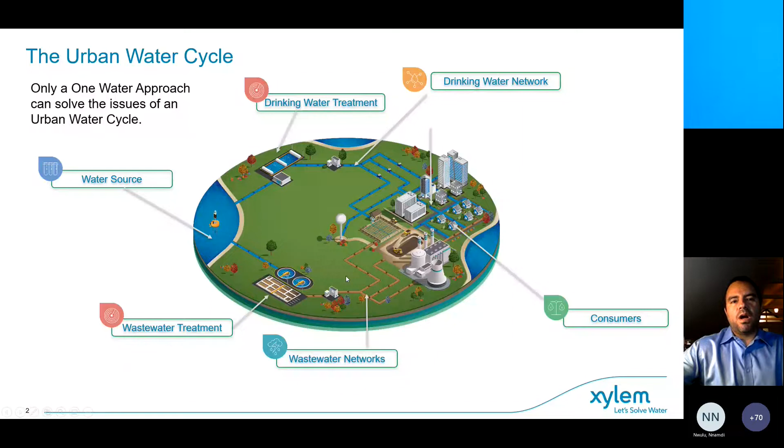But one of the things that struck me as I was finishing my PhD was the dire situation that we have with respect to water. There is a world water crisis. I think it is one of the biggest challenges that we face as humanity. We can look at a number of different aspects of our lives, but without water, we find ourselves in a very precarious situation. These are some interesting numbers that I was able to collect: 74% of world's disasters are water related, usually drought or flooding. 80% of wastewater is released to the environment without any treatment, and this water usually is consumed for drinking somewhere downstream as well. So that is a gigantic problem. More than 2 billion people lack access to safe, clean water, and 68% of the world's population will live in urban areas by 2050.

This means that the urban water cycle, and taking care of it, is more important than ever.

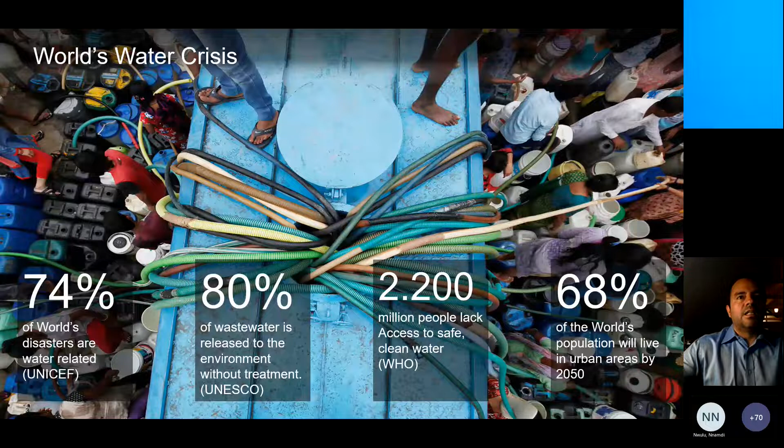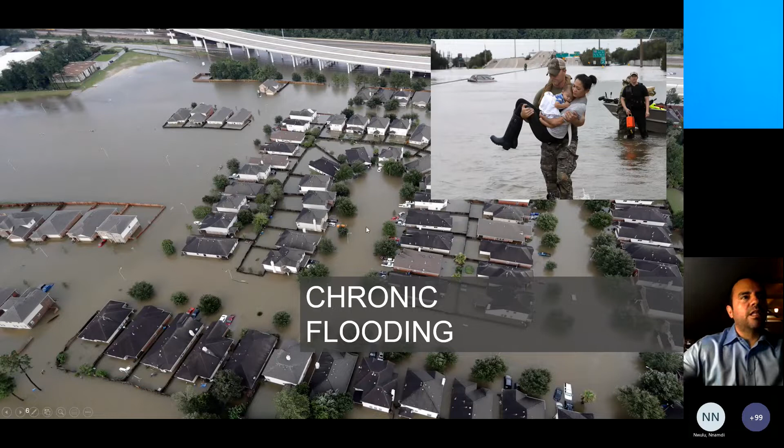Chronic flooding, we talked a little bit about this. This picture is from a 2017 storm flooding an area around Houston due to Storm Harvey. Again, a common problem found in large urban areas with large amounts of impervious surfaces.

All of these things affect our life, and the infrastructure we have to distribute and collect water is in many cases inadequate or lacking in general. This is a huge problem in the world.

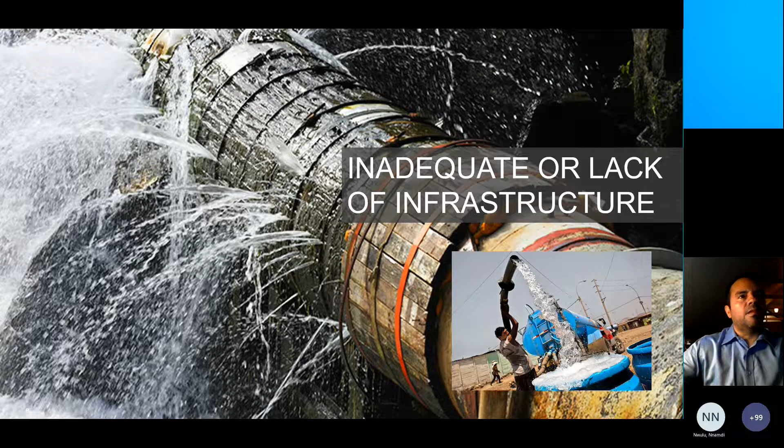When we look at the water utility, we identify a three-part problem. We call this a trilemma - it's an issue where we experience a three-part problem.

The first one is the need for capital investment. Utilities need to invest money due to changes in demographics. For example, a new area gets built that requires new infrastructure for both drinking water and sanitation services. Climate change means we need to invest in drilling new wells, building new treatment facilities, and providing infrastructure to deal with stormwater.

At the same time, utilities need to do this in a way that maintains those currently served undisturbed. And the citizens they serve have very stringent expectations about the water that comes out of the faucet.

In some locations, regulations are such that water is regulated down to the parts per billion in some cases. So there's a risk aversion that comes as a natural way of operating for these utilities.

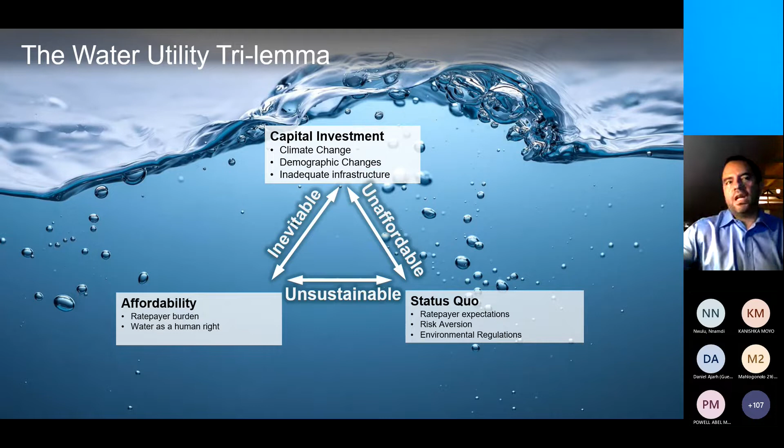Let's take one case, the city of South Bend, Indiana. This is the city where I am currently located, about an hour and a half east of Chicago. It's a small city with about 100,000 people, and about 33% of the population is below the poverty line. So by no means a wealthy city.

And they had a big problem that many cities in the United States have, which is a stormwater problem. There are more than 700 cities in the United States where the same infrastructure used to convey wastewater is also used to remove stormwater from the streets. And when it rains hard in these cities, untreated sewage gets released to rivers, lakes, and oceans to avoid flooding the wastewater treatment plant.

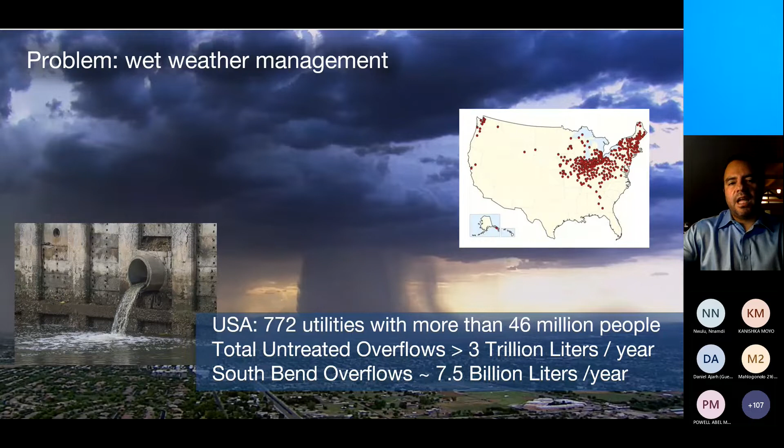Traditional solutions for this - and this was the original plan South Bend had to solve this problem - are capital intensive. Tunnels like the one in the picture are a typical large infrastructure solution to dealing with this problem. The problem is that traditional solutions to solve the stormwater problem in this city exceeded $1 billion, meaning more than $10,000 for every inhabitant in the city, which is clearly unaffordable.

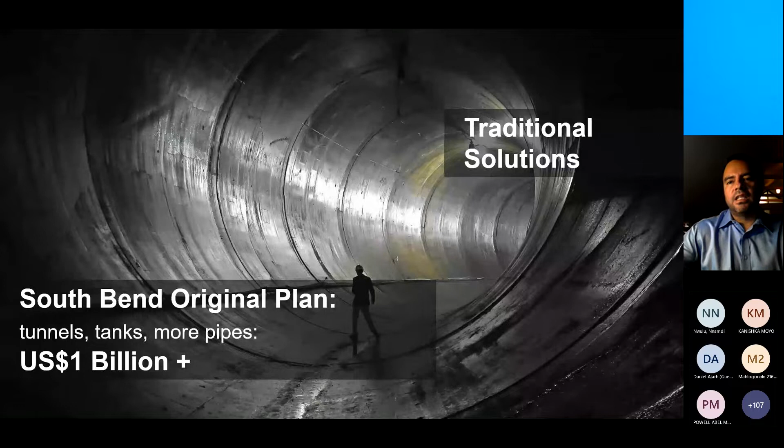So this is where we start considering digital solutions to solve this problem. The framework we use is called the Real-Time Decision Support System Framework. It leverages Internet of Things, artificial intelligence, and optimization algorithms to implement a framework where we first collect data to understand and observe how the system has behaved in the past, where it's been trending, and where it currently is.

We use a model to predict how the system will behave in the future, which serves as a digital twin to try out strategies on a model before we implement them in reality.

And then an optimization layer that allows us to try to determine what are the best action items to be able to operate the system better, to avoid overflows, to avoid flooding, to avoid leakage, to reduce energy. So these three parts feed into humans, the operator, for example, that then enacts these action items.

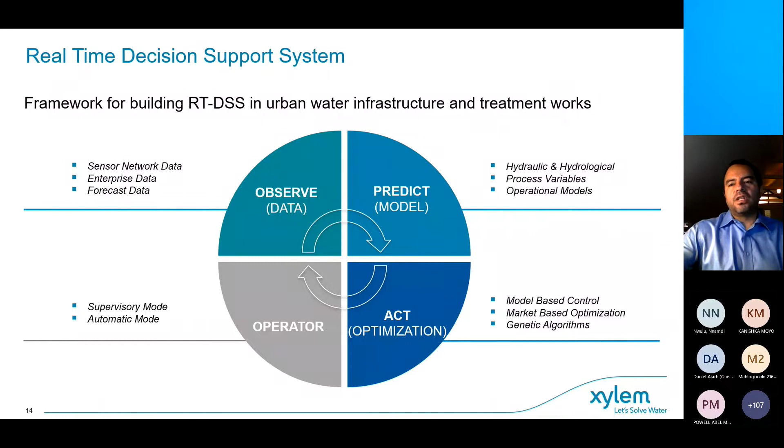Let's take a closer look at these three layers. The first layer, in this case, we call 'turning on the lights,' and we use this phrase because we're trying to understand how this infrastructure, which is in many cases completely underground, is behaving. This is different than, for example, managing transportation, where we can actually see roads, see how they are maintained, if they are crumbling down or not. A lot of this infrastructure is underground and out of sight. So we need to have the means by which we can provide visibility and transparency over this infrastructure.

The second tier is to create a digital copy or a model to be able to understand how the system will behave in the future. And then the operation part, which is where once we understand how the system is going to behave in the future, we act to, for example, open and close valves, turn pumps on and off, to better manage the infrastructure and avoid the problems we saw before.

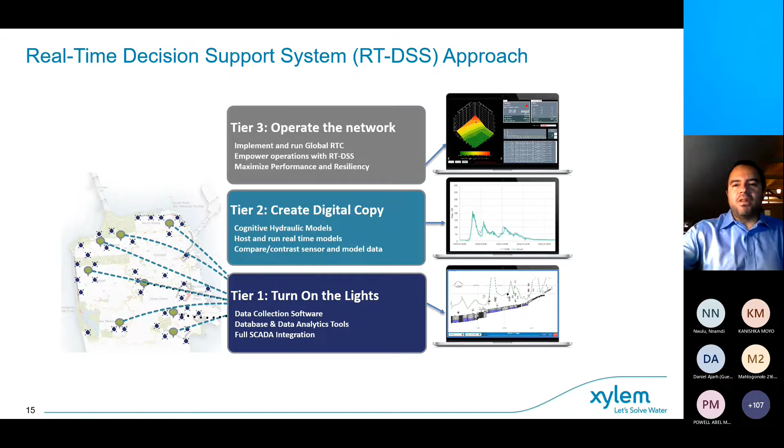The enabling technologies that we have to do this are the Internet of Things, which allows us to deploy large sensor networks throughout the infrastructure in large geographical areas; artificial intelligence, which enables us to build digital twins of the infrastructure; and optimization algorithms, many of them inspired by nature, biomimicry, where, for example, we use genetic algorithms or market-based optimization to determine what is the best way of operating.

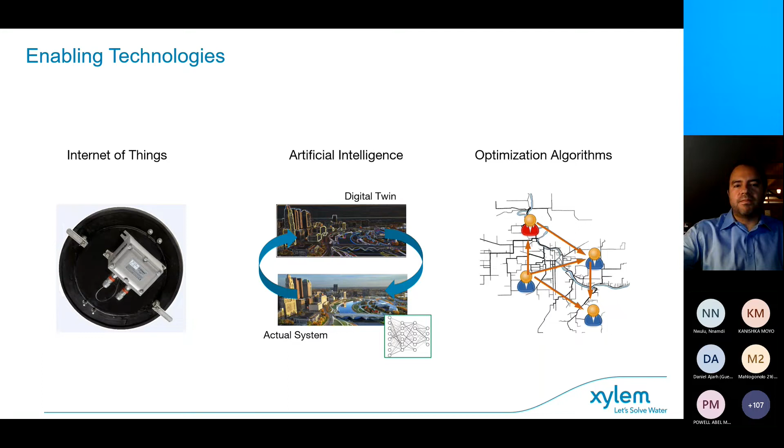So let's drill down into these concepts for South Bend and what we did there to deal with the situation of stormwater and the overflows that they caused. The first step is turning on the lights.

Here we have a map on the left that shows all the different locations where we were able to deploy a sensor network. The sensor network in this case consisted of a device mounted underneath a manhole cover that contains a battery, a radio, and a sensor that measures level or flow. These devices, about 150 of them, are deployed on critical, hydraulically critical parts of the stormwater and wastewater network, allowing us to provide visibility on what is happening.

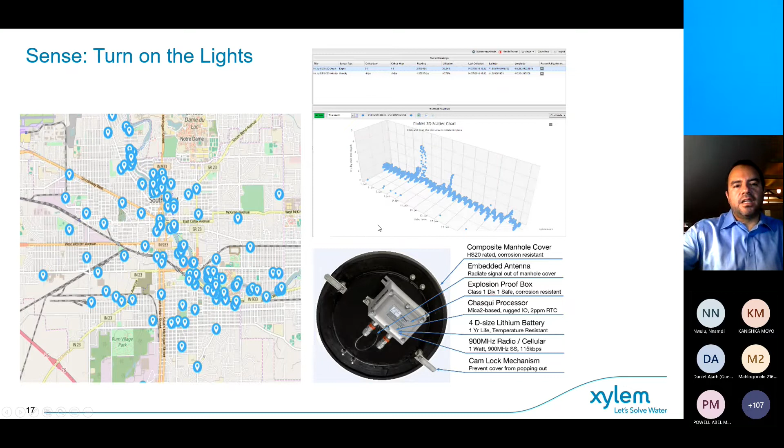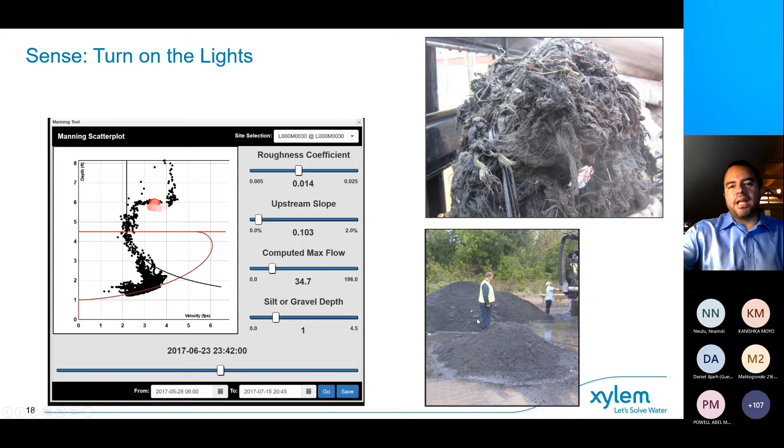With this visibility, for example, we can plot how the velocity versus level characteristics in a particular pipe show the pipe is actually operating. And when we see that operation deviates from what we consider the nominal operation of that pipe, based on how it was originally built, then action can be taken to point operations and maintenance workers to, for example, find obstructions that prevent that pipe from working the way that it should.

And this is just one pipe. Much more visibility over how the entire system is working is possible. So this was one dashboard built for the city of South Bend to help them visualize how the network was operating at any point in time.

And to give you some reference here, this pipe called the Interceptor Pipe is the largest pipe and largest piece of infrastructure in the stormwater and wastewater system in South Bend, Indiana. It collects water from the southern part of the city with a smaller pipe that then gets bigger and bigger as it collects more water from the city.

The blue boxes here are essentially the level of water in the pipe, and whenever we see it going pink, it means the hydraulic grade line is going above the crown of the pipe. The green line represents, at scale, the elevation of the street at that particular location. You can see this pipe scale is crunched horizontally—this pipe is about 10 kilometers in length—and expanded vertically so it can fit on the screen. However, what you're looking at here is all to scale.

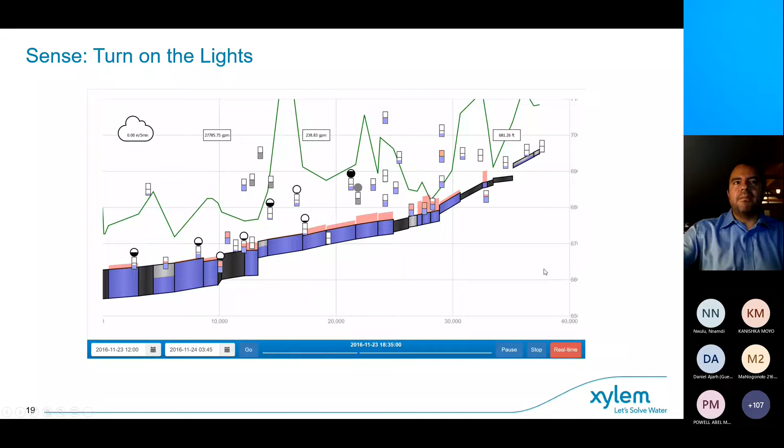And this would allow us to predict what will happen in the future. To do this, we utilize a neural network application that gets trained with the data we have already collected from our sensor network. This artificial neural network is able to collect all of this data and train itself.

The way we understand that this neural network is trained and able to give us a good prediction is by comparing it to a past event. As an example, in this graph we have the flow on a particular pipe over a period of time that covered a couple of storm events, one big one and a small one that happened a few days later.

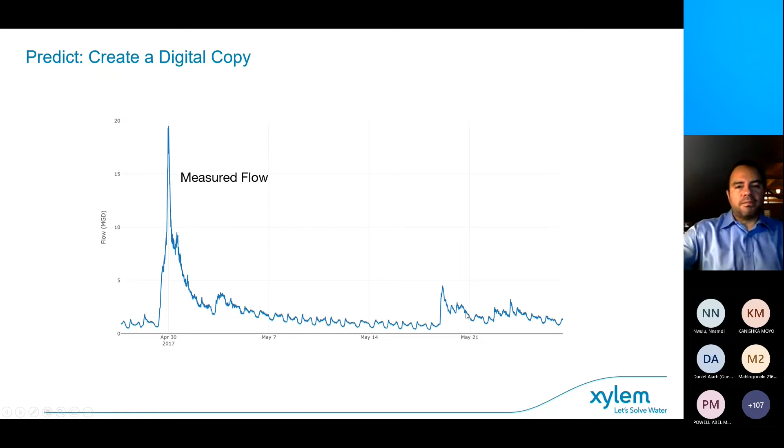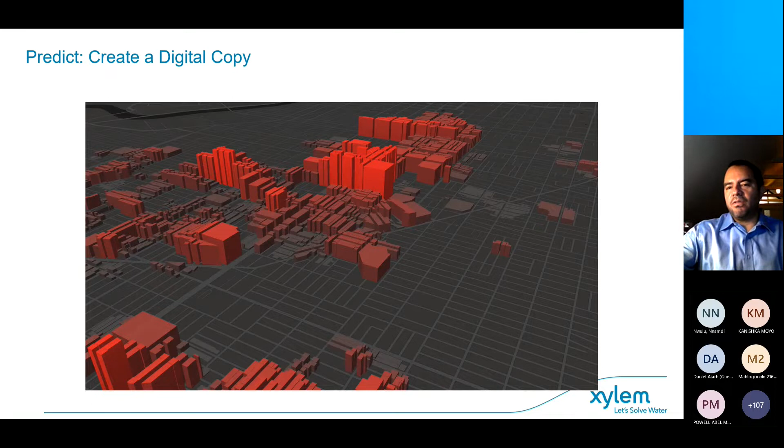We utilize this information with rainfall forecasts to predict how the system will react to a particular storm event approaching us. We don't just take the rainfall forecast as it is, we go deeper and try to understand the probabilities for rainfall in different areas. With this information, we can generate a number of different possibilities of how a storm will affect a particular area, and create, using a Monte Carlo simulation, different scenarios of how the flow in the pipe will behave. With this, we can map the areas in the city that are at higher risk of flooding.

Now, with this information, we're able to understand how the system is behaving right now and how it will behave in the future. However, we also have the ability to control how the system behaves. We have a few gates and a few pumps in the system that we can control. So the question is, what is the best way of controlling this network?

For that, we were inspired by how the stock exchange behaves, and we use biomimicry, taking how the stock exchange behaves as a framework to come up with an optimization algorithm.

To give you an example, we have an area in the city experiencing too much rainfall and about to overflow. This area has a computer attached to the sensor detecting increased flows happening in that location. There's a software agent in this device that behaves according to simple rules of supply and demand. This agent says, I need to buy more capacity downstream of this network because I'm experiencing too much flow. It connects through the network to, for example, a storage connected to it hydraulically downstream and says, I need to buy capacity, can you sell me some capacity?

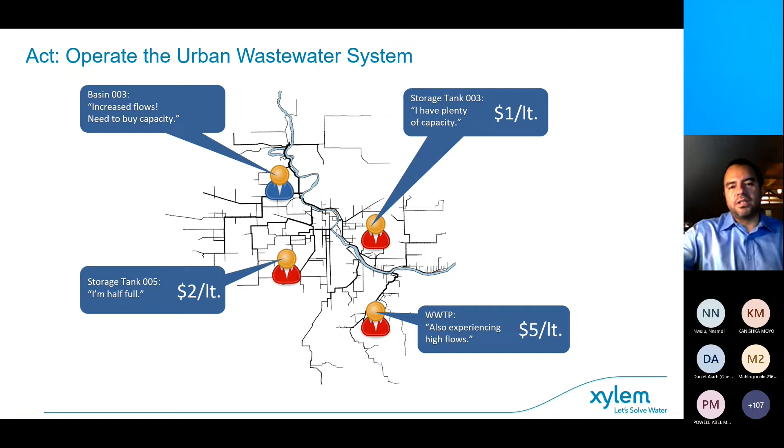Another storage tank may have actually plenty of capacity because it hasn't experienced rainfall in that area and says, I will sell you this capacity for $1 per liter. And so valves open, pumps get to be actuated, and water gets directed to the agent that has the best offer.

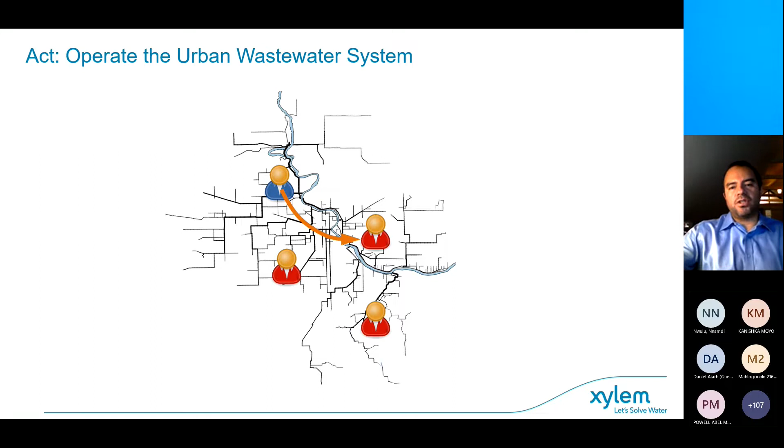Now this tank might get fuller and it may start having its own price increasing, and maybe it will get to the point where our blue agent starts sending water to the first tank. In this manner, in real time, all of these agents who are competing for capacity manage to fully utilize all the infrastructure before an overflow happens. And so the results for this system have been quite good.

Since the system was commissioned, first the sensor network in 2008 and the control system with the software agents at the end of 2010, we have seen an 83% reduction in overflows.

And what this has resulted in for South Bend is being able to go from a $1 billion capital infrastructure investment budget down to $500 million capital infrastructure budget, simply due to a smarter way of managing the system.

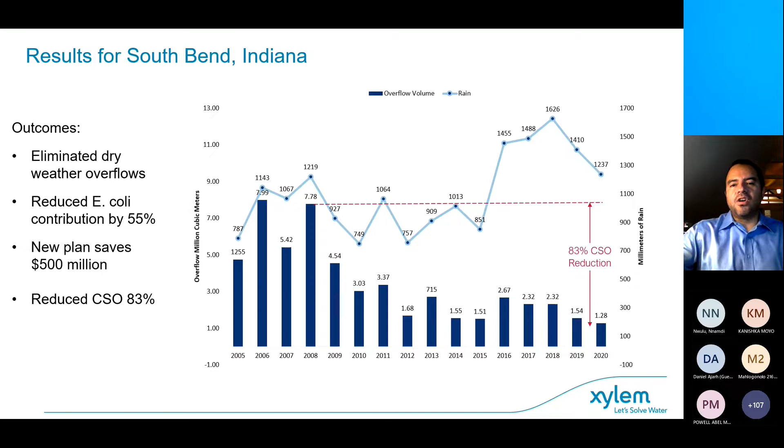Another example that we see on the other side of the network, which is the water distribution network, is water loss, and the same principles apply. In this case, I'm going to tell you about the province of Air Selangor in Malaysia, with a population of 8 million people. It's a fairly large utility that manages more than 6,000 kilometers of water mains and experiences 33% of water loss due to leaks in the system.

Now, you may be surprised that for every 3 glasses of water, 1 is lost, essentially due to leaks in the system. But this is actually not a bad number. It is very, very common for utilities around the world to have this level of water loss. In some cases, this number can get up to 50, 60, 70% of water loss, where water essentially leaks in different parts of the system and completely disappears in the ground.

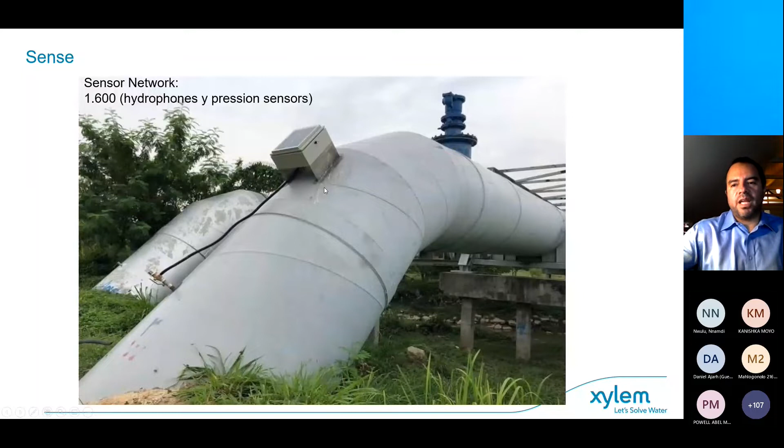So for Air Selangor, about 1,600 sensors have been deployed in a number of different locations, and so these sensors then are able to pick up noise that may be coming from leaks. And this is the part where machine learning has been deployed to be able to recognize that a particular sound is not just a truck driving, for example, by,

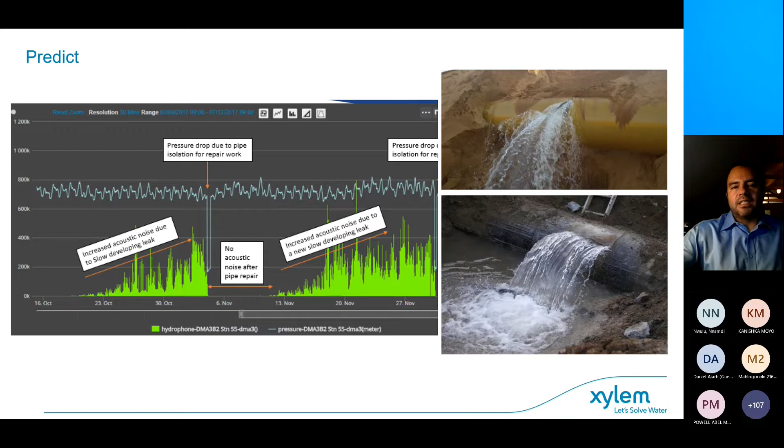but it is from an actual leak. So the system is listening at all times, and an artificial intelligence system is listening for leaks that then get to be alerted to workers that then can go out and repair the leak. So for this system, about 2 leaks per week are detected, and it represents really the most optimal use of operations and maintenance workers to help direct them to the specific locations where they need to repair leaks to be able to reduce the amount of non-revenue water that they're experiencing.

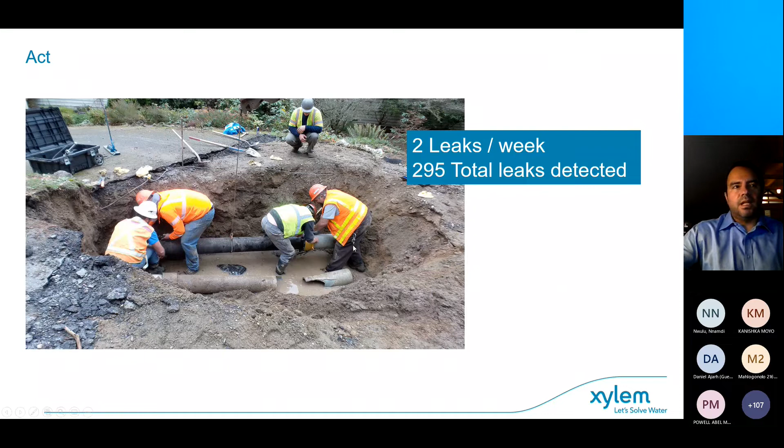Yet another example here, in this case for wastewater treatment plant, and at this point I'm going to take you to Cuxhaven in Germany, with a population of 400,000 people. They utilize about 8 million kilowatt hours per year to treat wastewater, and about 50% of the energy budget that they have gets to be utilized by the aeration system. The aeration system is nothing more than a system that blows little bubbles inside of the wastewater that helps microorganisms that live in the wastewater to break down the contaminants.

So infusing air into this water is very expensive in terms of energy, and even as you can see from the picture, the majority of this air gets to be lost to the atmosphere.

Only 24% of the oxygen actually gets used by the bacteria in the water to break down the waste. And in many cases, the measurement taken to understand if there's sufficient oxygen in the water is the dissolved oxygen, which represents less than 1%.

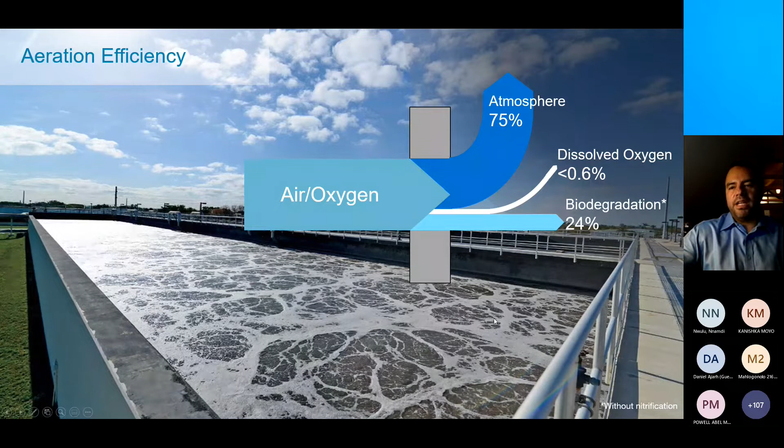So this is a case where we deploy a number of different water quality sensors throughout the system to understand different parameters: water temperature, ammonia, flow in different locations, dissolved oxygen, to understand how the system is behaving. All with the idea that we want to introduce the right amount of oxygen in the water, and not more than what is actually needed by the bacteria, because it's just wasted.

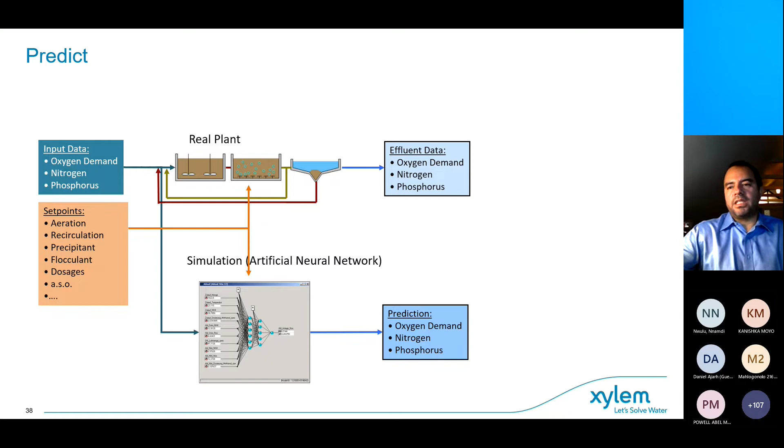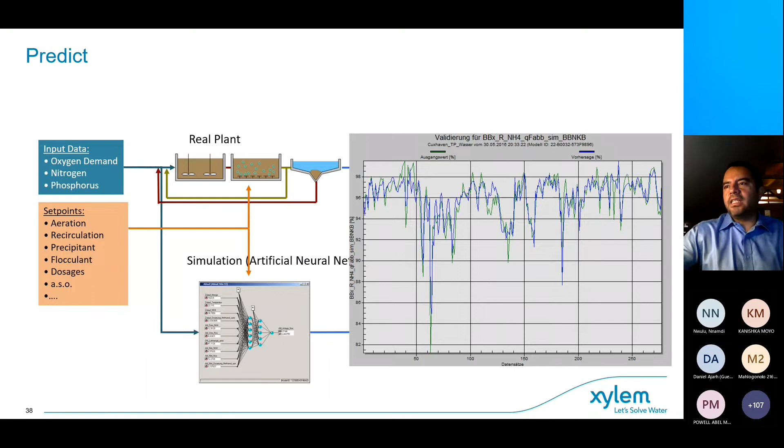And so at this point we use, again, biomimicry. In this case, genetic algorithms, where we simulate thousands of different scenarios of how much oxygen is pushed into the water, as well as other parameters like how much recirculation happens within these tanks. With this information, we're able to automatically select the best solution that gives us the least amount of power consumption.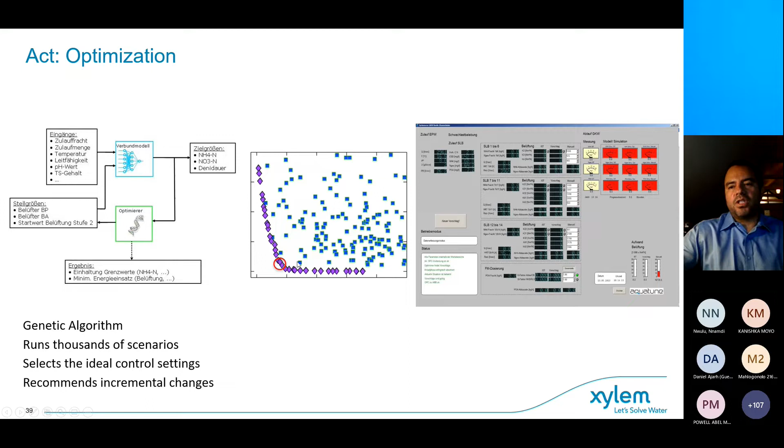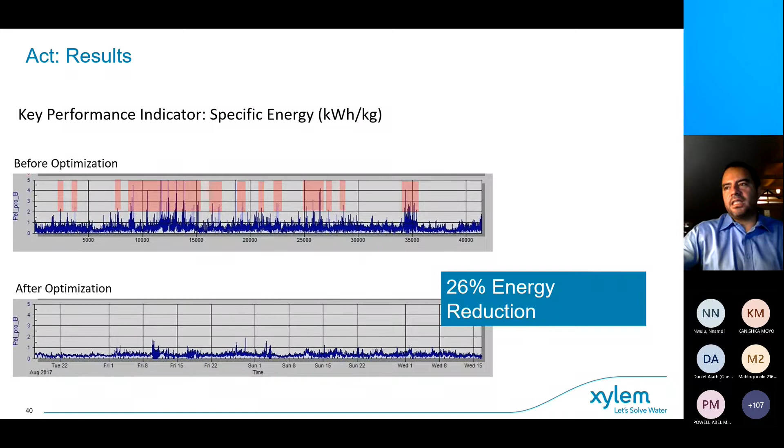So the real-time decision support system provides us with a framework that we can utilize effectively to eliminate or mitigate all the issues we saw on the trilemma of a water utility.

Much work needs to be done still to connect these systems together to have a more comprehensive view of the urban water cycle. Right now we have very advanced systems looking at particular segments of the water cycle, but we want to understand how the wastewater network operates in such a way that we also help the wastewater treatment plant reduce the amount of energy it uses.

Going further, we want to understand how water gets distributed throughout the entire system and how it gets utilized, so that we can reduce the energy footprint of our drinking water network. That's something we haven't talked about. The water in the drinking water network needs to be pushed and maintain a certain pressure, and stored in different locations. That can represent a huge energy budget, a huge expense for these utilities.